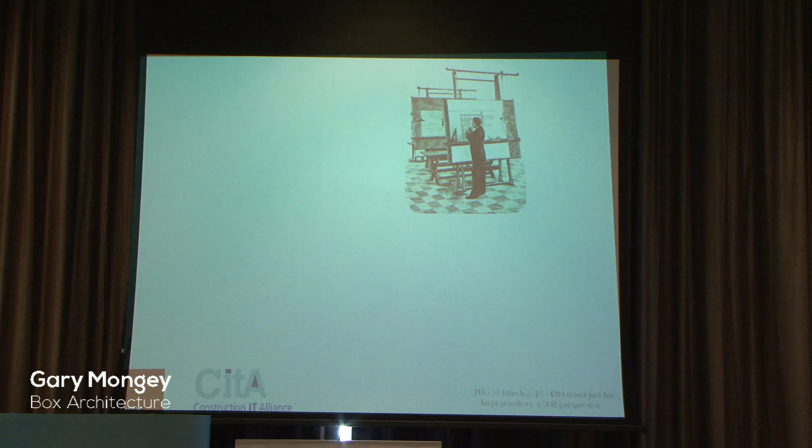So the learning curve, I won't be telling you lies, I'll shoot straight from the hip. There's a huge learning curve. It's the same as going from a drawing board to CAD, and probably more involved, to be honest.

It does take time. You need to resource time in your offices or construction firms to upskill people. It does take money. You have to invest in the software, in the lost time that entails, and it does require a lot of training, periodic training as you work your way through it.

So in our history, we started in 2007. A sales rep came in to do an audit on the IT in the office, and we were happily using a free license of AutoCAD LT and SketchUp, and I was happy out. We were producing a huge amount of work. Within 5 minutes of seeing the presentation of the software, I said, this is the future.

This takes mundanity out of what we do as a profession for me. I don't know how to use CAD. I hate opening the software. The only reason I have to open it is to actually get information out of it, and then I get rid of it. I don't know how I used to design in 2D, to be honest.

We always design in 3D now. The software makes you think in 3D, you design in 3D, you communicate in 3D, you communicate with everybody in 3D. The numbers required to run a project, you'll see I'm going to show a little bit of the library.

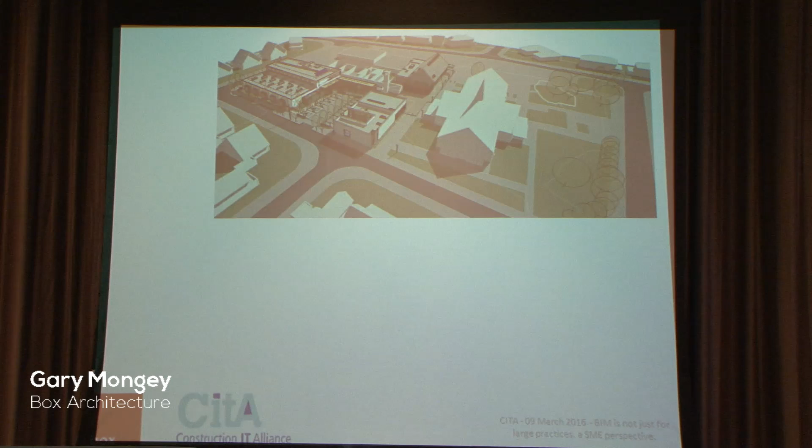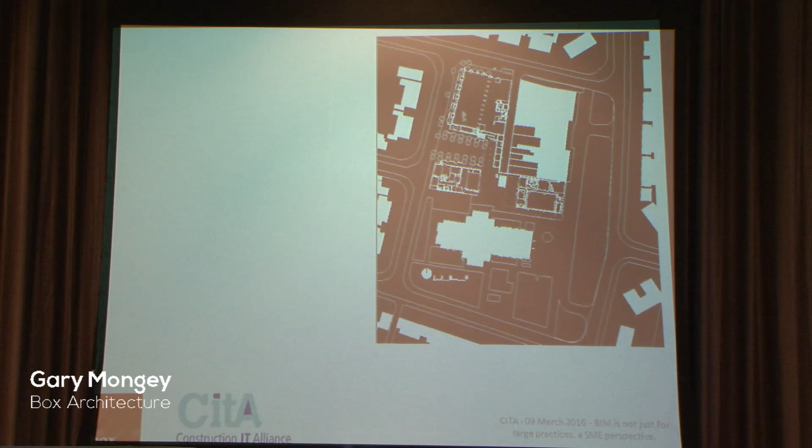So basically, it was 3 projects which we had. We had the library, which we finished last, the community centre, which was a refurbishment, and then a pastoral centre.

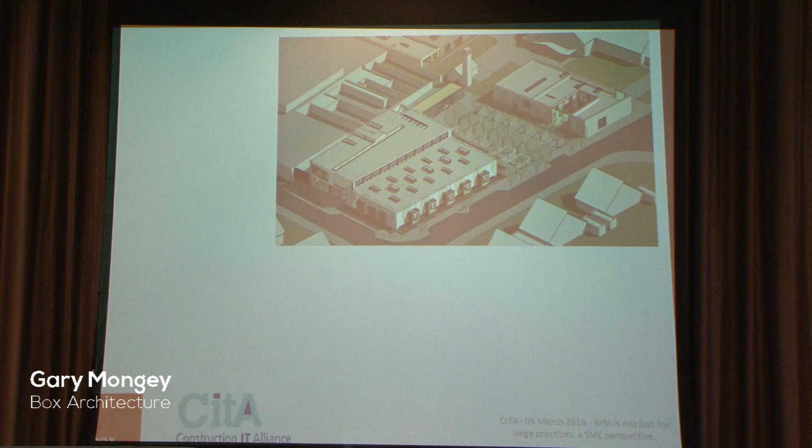So these images are straight from the software. There's no fantastic render systems here. This is straight from the software itself. These are the pastoral centre, some of the finished images of it, internal courtyard. This was really interesting for us in terms of our first real exploration into using the software.

This render is straight from, I think actually through 3ds Max, through a guy I had working at the office at the time. So that was the render, which we were able to discuss with the client, and that's the completed image. You can see how close it actually gives you information and visualization, and that doesn't take very long to produce. Again, the sort of main room itself.

So to get started, to get into BIM, most people, I don't know if they're actually into BIM or thinking about getting into BIM. It's fearful, I was fearful when I had it. This laptop nearly went out the window a good few times trying to learn how to use the software, I'll admit. It doesn't do it anymore, thankfully. Okay, so you just need to jump in the deep end. If you want to do it, do it. Excuse the French, don't piss in the pot or get off it.

Okay, if you're going to implement BIM, do it. That doesn't mean you throw everybody from the office into it, but throw a team into it that starts it. So apart from the obvious stuff like buying software, good RAM and all that, for smaller practices, Revit LT's an option. You don't have work sharing, where all of us could work on the same model at the one time. That's the only downside, but it's a cheaper form of actually using the software and gets you into it quick enough.

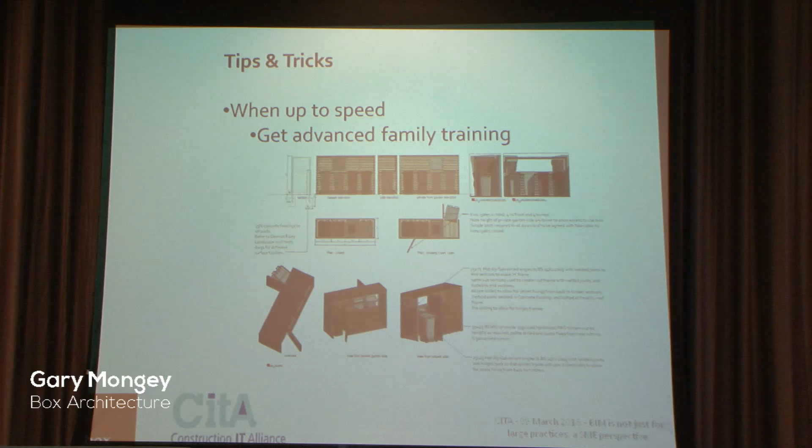So this is a simple bin store that we did in a small project. The bins themselves we got off a website. So what I do is put in what I want, put it in Revit, and you get a list of information, and then you can find what you want. Making up the bin store itself probably took about 2 or 3 hours. I have a drawing I can produce, a 3D drawing - it's about communication for me. People can see it, clients can see it, people who put it together can see it.

So the interesting thing about Revit is that it's the same methodology - what I mean is it's the same process, the same interface once you use the software itself. You react to it exactly the same. So once you understand the logic of how the writers actually made the software, it becomes second nature - you don't even think about what you're doing.

So what we've done is set up a good template that we transfer between projects. So for a small domestic project, we model in the same place. What happens then is that starts to populate sheets, information starts to gather - you make the model, the new design, put in simple things like a radiator, and a schedule populates. That's all set up in the template. That's how you save time - you're not getting into the mundanity of constantly reproducing the same information all the time.

So this is the schedule of powers, understanding the power of a schedule and the intelligence of the software. In 2D information, you can model everything if you want, but your machine will explode. So what you need to do is model accurately, but sparsely - correctly dimensioned, so you know what size something is, and then you add the detail afterwards.

Within that as well, you can tell a line that it's a DPM, a DPC, or a vapor barrier, and then you can tag that within the software, and give it codes to show it, so that it knows what it is.

So the benefits for us - we always think in 3D, constantly looking at the model in 3D. Productivity is exceptional. Small domestic projects - if we go out and survey a house, I'm giving you an example because I'm here for the small practices - within 4 to 6 hours we would have the property modeled. We'll have elevations, sections, plans, everything ready to get on to thinking about what wonderful ideas we're going to do. So we can draw it very quickly.

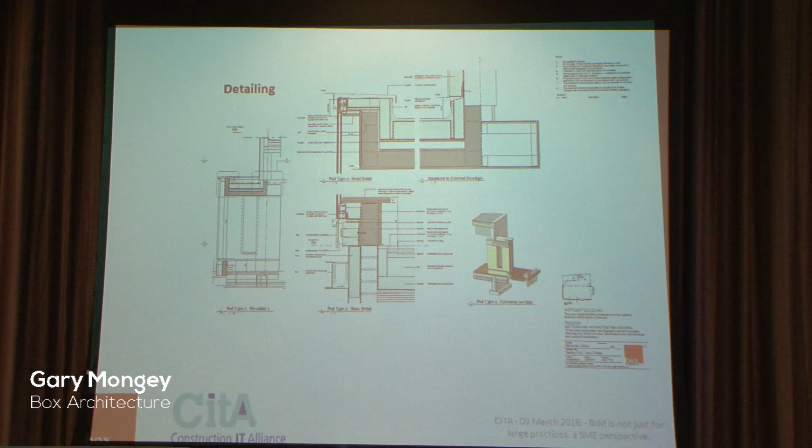So these are some images that come straight from the software itself. In detailing, you have the straightforward sections that come out of the model with a little bit more added, and you can also add on 3D images. It's about reinforcing the idea of what it is.

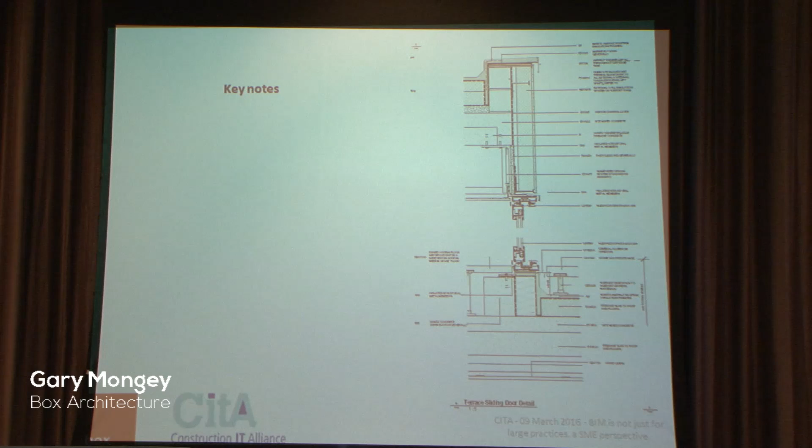Keynotes, as we all know from NBS - once you tell an element within the model what it is, it always knows what it is. So you can simply put your keynotes down whichever way you wish, and you don't have to keep telling it what it is. It knows once you've done it. That's the benefit of being parametric.

In smaller projects and standard typical details that we use, these are 2D details we've worked up - you can simply copy these from one project to the next, so you don't have to constantly keep reinventing. We keep all the sheet numbers the same, so there's a logic to the whole way the system is organised.

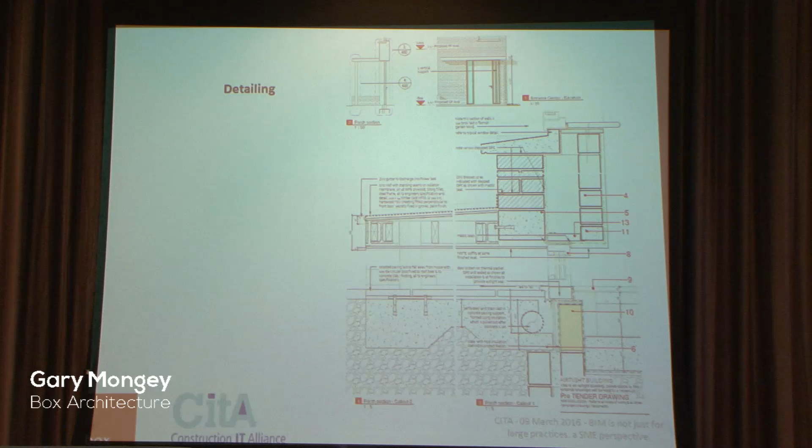I think detailing is much, much easier to do in Revit than it ever was in CAD. You're not worrying about whether a blue line is a 0.5 pen, because it actually shows you what you can see. There are components within the software, so you can get all your nuts and bolts and literally everything into it. Here's some more detailing - the schedule, a typical schedule. We have this set up, with a sheet set up that sits in the background.

You put in the information. I can give this information to an M&E consultant, or I can give it to a plumber on site. He knows how many radiators he has to put in, how many toilets he has to plumb. It's much easier to price. Again, it's about communication of information. It's not just a drawing.

I'll show you a little bit about this. This is, if anybody's interested in whiskey, probably going to be the best whiskey bar in the country, maybe one of the best in the world. You're going to have 750 whiskies to taste, 450 of them Irish. It's one of my part-time passions. Anybody who knows me knows I adore the stuff.

You can see here we've designed around casks, and you'll be able to actually bottle your own bottle of whiskey. So the important thing is once you have it in your head and you know what it's going to be, to do this took about 3 to 4 hours.

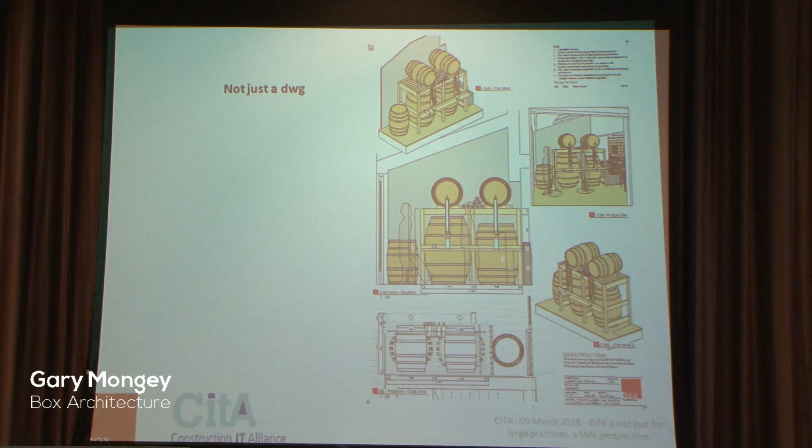So I have an elevation, I have a plan, and I've got 3Ds. If I sit down with a subcontractor, I can say this is what it looks like. They get it, they're not saying what's happening here, what's happening there. I can rotate the model, and we can all discuss and iron out the issues that happen.

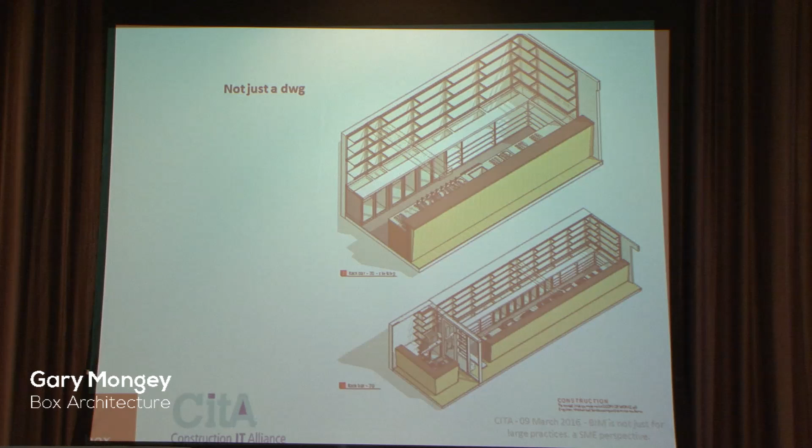Again, this is the back of the whiskey bar. You've got shelves. These are all sort of made up as different families. You can get information off the web quite readily.

A lot of people think that Revit doesn't do pretty drawings. I think it can, if you know how to use it, if you actually get into how to understand how to use it. And interestingly, through my journey with Revit, I've been asked to go into DIT.

We're implementing a BIM into the School of Architecture through all 4 years. And I suppose the way I look at it is, rather than trying to bamboozle a student who is grappling with the software, I remember I used to have a picture of Garfield, and he had a stack of 10 books on his head, and he says, I'm learning by osmosis.

So my theory is that what we do is we teach them how to use the software, but don't teach them about BIM directly - indirectly they understand what BIM is. So that you actually understand the benefits of thinking in 3D, and then it becomes second nature to them.

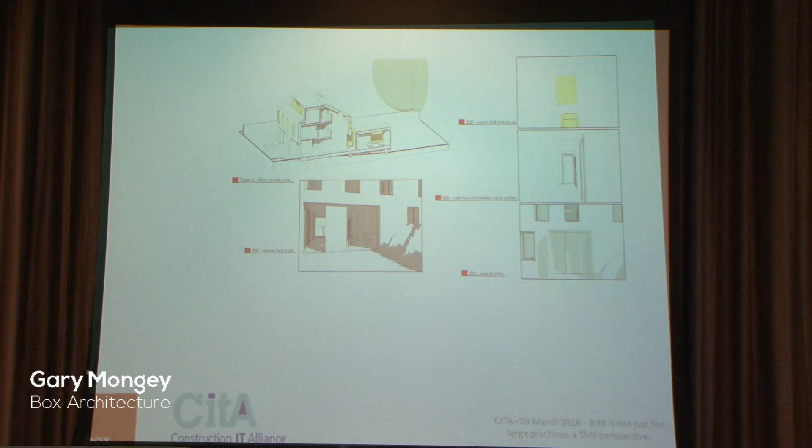So again, some more images. The software - I'll come back to this probably at the very end. It's just to show you, most people talk about how fantastic it is. And I think Ger is here - Ger gave us the first 5-minute presentation, and I knew this was the future. I think when you see it, and you understand how you actually interact with the software, you understand the benefits of it.

So the key point for me, a couple of key points, this is the main key point: you have to draw. It's a design, it's a tool. If I don't know what it is here, it's not going to produce down here. You still have to think about what you're going to do. You still have to communicate with people. You still have to get collaboration with everybody.

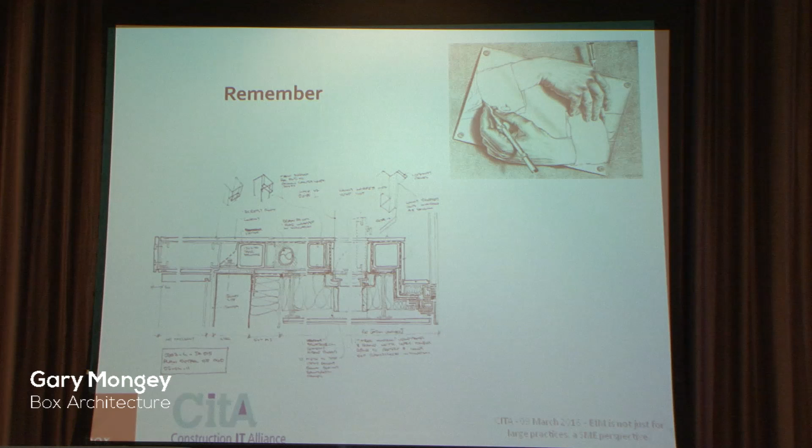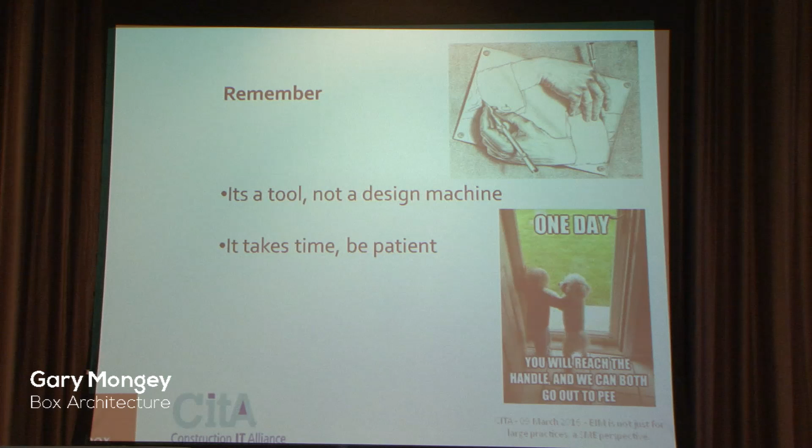So in, say, the library, I would have spent about 2 weeks developing up this idea, and then that gets implemented when you know how everything goes together. But you have to know what it is before you do it. So it's a tool, it's not a design machine. You have to know what it is before it can come out. It does take time, you have to allow for that time. And there is a learning curve, but it definitely is worth it.

So some links - I think this was shared, some of these links, but some of the ones that we found quite good: obviously the Revit User Group Ireland, they meet once a quarter. They go through architecture, M&E, structural and other sort of topics, they're worth attending.

Revit City, this is sort of more American - it's sort of nerds who just make stuff. So you'll get trucks, fire ambulances, you get everything you want. They're handy if you're looking for quirky stuff, like the bin store or the bin I got from Revit City. It's not 100% accurate because they're made from people who haven't made sort of standardized objects.

BIMstore.co.uk is much better, it's getting much better all the time. They have Dorma and other manufacturers that produce and feed information that's accurately made, with web links, F&M, and level 2 plus information built into it. NBS Create is probably the best for manufacturer input.

They've got doors, windows, valves, M&E, structure, everything sort of near enough that you want. One that we came across recently was Modlar. They do floor finishes, wall finishes, furniture, but we don't use it that much.

YouTube, if you're interested in listening, no disrespect to many Americans, will tell you how to do it. It's amazing how, even now, stuff I wouldn't know, I'll just go 'problem, Revit', get a YouTube video up, and within 5 minutes you have an answer. There's an abundance of information out there if you get stuck, so it's definitely worth doing. I put the word Revit in and what I'm looking for, and I get an answer. There's a lot of information there.

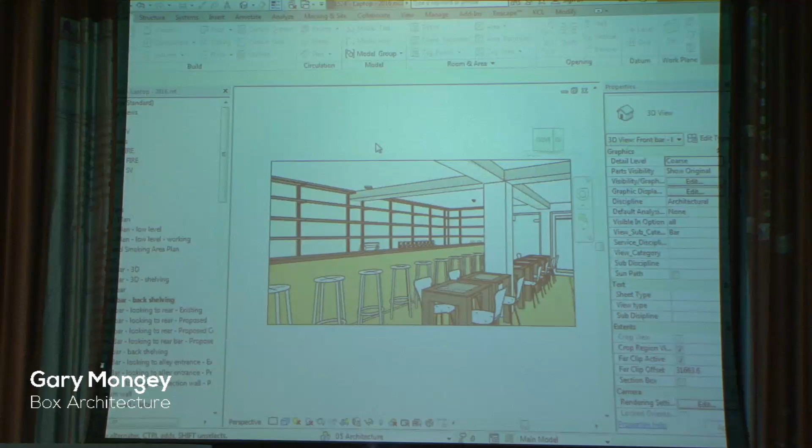Okay, so hopefully you can hear me. So this is how you look at the model. This is fairly straightforward.

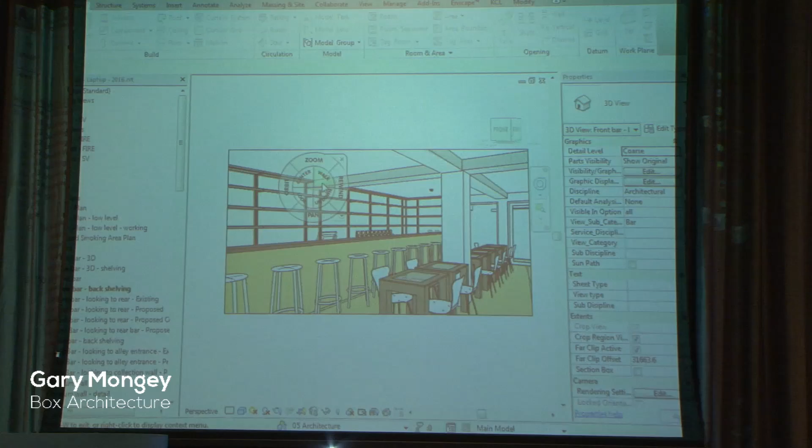So this is simply how you interact with the software and how we communicate with clients, with everybody involved in the project. The magic thing is to go Shift W, and you get this magic wheel - you can orbit, you can pan, you can walk. So basically, very simply, I can walk around what we've created.

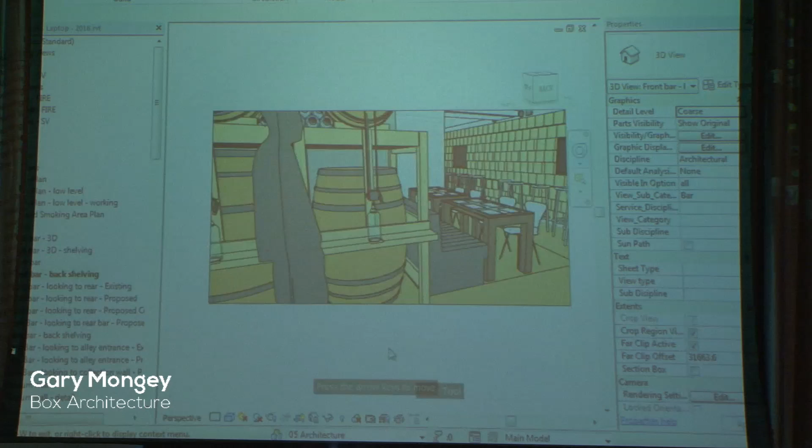So you can see, and this is where you get your whiskey - you can have a look around, you can see everything you want to see. That's a very basic, simple, non-graphic method. The clarity it gives to clients, it's so easy. We use this all the time to communicate and walk people around.

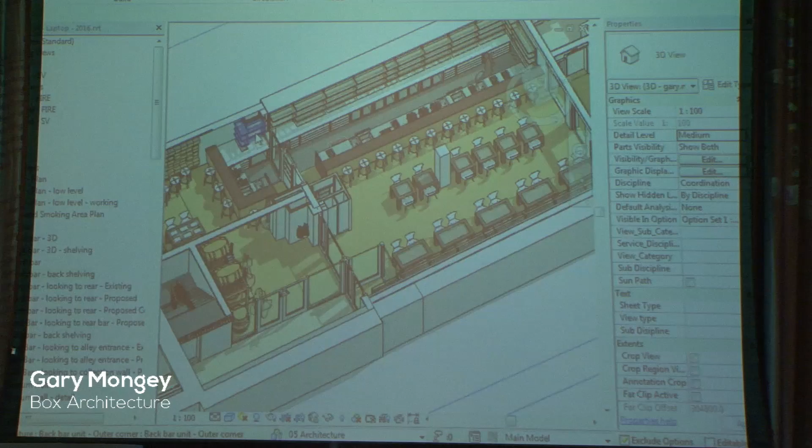Then you have the 3D, because everything's made in 3D. So if I'm going in and meeting the guy making the shelves, I can zoom in and show him what the shelf looks like. I can cut it, pull it, rotate it. The power in communication, in thinking in 3D and communicating in 3D, is at the basic level what BIM is about. This is why I saw it as the future when Ger went through how you use the software. This is the benefit - these shelves would have taken half an hour to an hour to make.

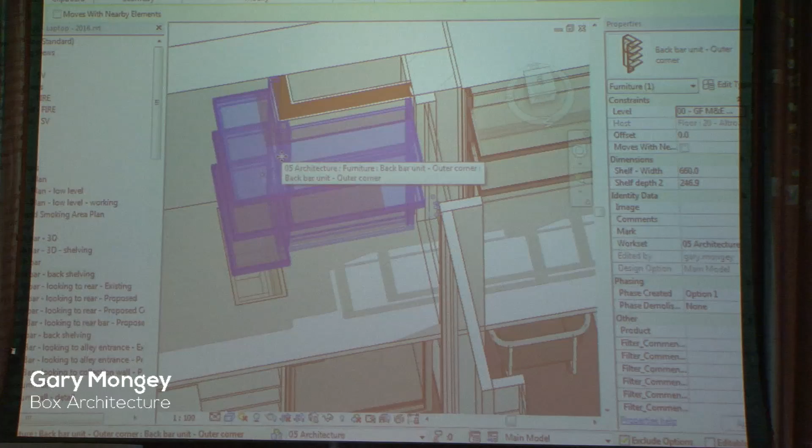And then you just simply make different types of versions of it. You can go in, you can pick it. This is all the lovely models, and then I have a thing that I can show somebody. So this is the power, and for me it's about accuracy.

Again, you don't detail every little curve and every little bit, but if you know the height and width of a bottle, you know that it fits. If you design all your M&E structure, all your drain pipes, you have to know where they go. Software allows you to do that. BIM allows you to do that. So for me, that's why I think BIM is the future.

It saves time with design. You get a much better, clearer brief out of a client. The contractor knows what they're putting together, and then the information can transfer over for FM, for future levels, so people actually know what it is. Clients will ask me, who was the guy who put such and such in? When you have a model that has all that information in one place, that's the power of BIM for me. Thank you.